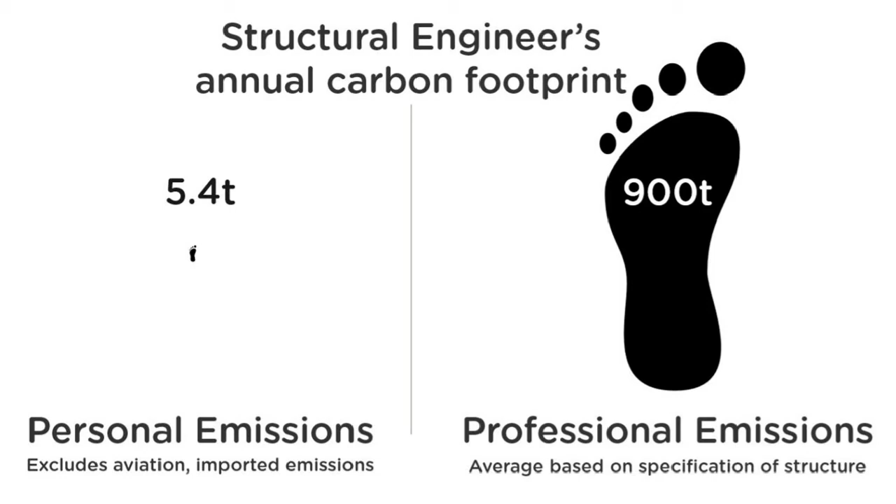Now, to put that into context, you've seen some really good things from Natasha and Margaret about this in terms of an engineer's footprint, in terms of personal emissions versus professional emissions. Now what I think is actually that the professional emissions are a little bit higher than that, even still, just because as Margaret mentioned, most of her things were A1 to A3. Obviously the good work that John's doing now in terms of capturing the A5 in there, I think ours are A1 to A3. I think the professional emissions are actually a lot higher than we actually think they are when we start to include waste. So for me, putting it into this kind of context really helped to galvanize my thoughts on it and work out where we were going to go.

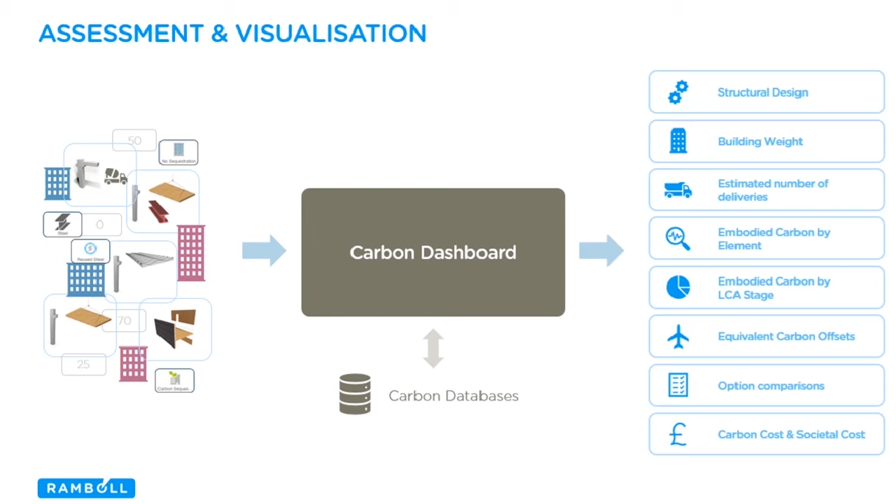So how do we solve this? Well, we're going to hear later, and we've heard from Natasha about challenging the brief, optimizing the design, cutting the carbon. They are exactly where we need to be focusing. But I also think there's another bit to it. When we start to look at it, we can do all these carbon dashboards, we can do life cycle analysis, carbon offsets. We could even start to look at the carbon cost and the societal cost of what we're looking at, right back to what Mike was saying about the donut and things.

But really, I think there is also another layer to this that we should be thinking about, and that's thinking about a digital and data-led approach to decision making. So whilst it's not something that would come naturally to an engineer, the decision-making aspect, the digital and the data-led, it's just a natural extension in my mind of where we are going as an industry and where we need to take ourselves as an industry.

So how do we make decisions at the moment? How do we work through things? Well, normally we have a fairly standard linear process of design, procurement, delivery, and then operation. And through all of these, we start to add value, and at the end of it, we've added a lot of value, whether that value is monetary, whether it's in reducing embodied carbon, reducing overall carbon, those kind of things.

But actually, what starts to happen is at various points, we start to lose that. So that's, again, that question that Margaret answered about how do we ensure our contractors are following through on what we specified. Those kind of things are where we start to lose that. And we end up with what I think is a really big missed opportunity here. And a lot of it, I think, comes down to decision making and how we do that.

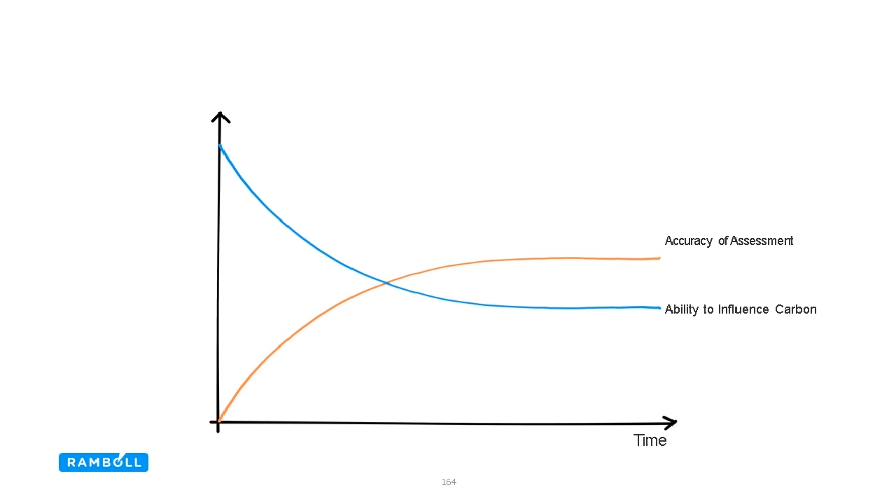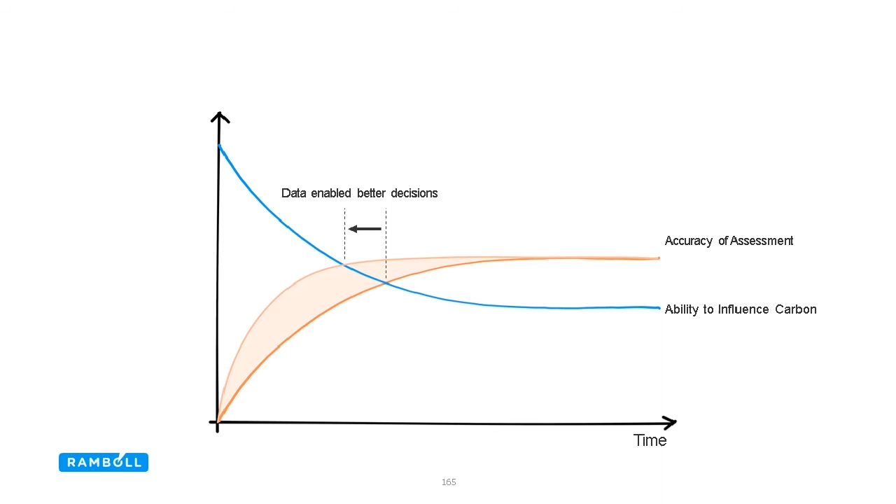So what we can do is, if we start to capture our data and work in a digital way, we can really start to bring that accuracy assessment across to the left. That means our ability to influence carbon is increased, and we can make those decisions at an earlier stage. So we can really start to look at that and address it.

So how do we think we can make better decisions? Well, there are lots of publications out there, some really good ones, about modern methods of construction, productivity, industrial strategy, and they are great, and there's a plethora of them, but our clients are not going to have understood or read those. Really, we need to disseminate that information to them. But I think there's three key things we can do to help our clients and push forward the agenda of minimizing waste, which in my mind means minimizing carbon as well.

So there's three kind of aspects to it. The first one is standardization of our designs, of the ways we're working. The second one, following on from that, and it has to start with standardization, is off-site manufacture - what can we do in terms of off-site, and how can we maximize the opportunities for that? And then overlay that with a digital thread, in terms of how we can use the digital world to enable us to make those better decisions, to go further and faster.

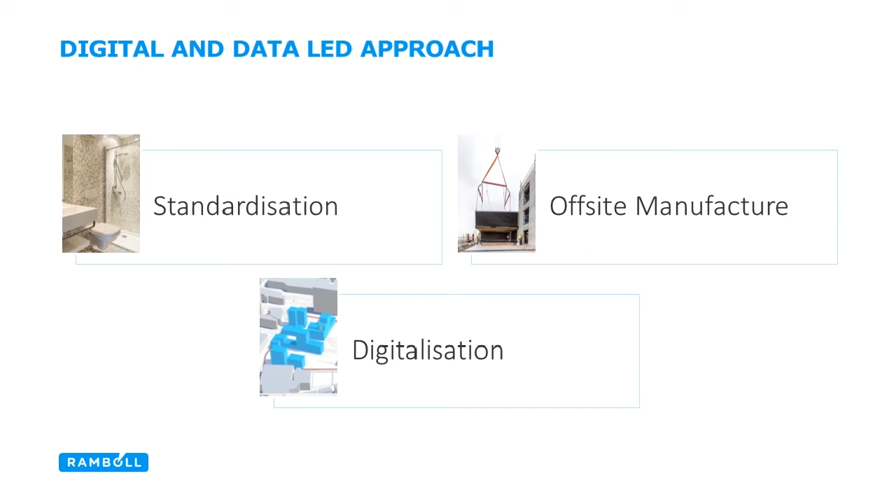Now, some people may say digitalization has lots of drawbacks, and yes, there are, but we have to embrace them and work with them and make sure we can maintain that quality and that service to our clients while producing that, by working down the digitalization route.

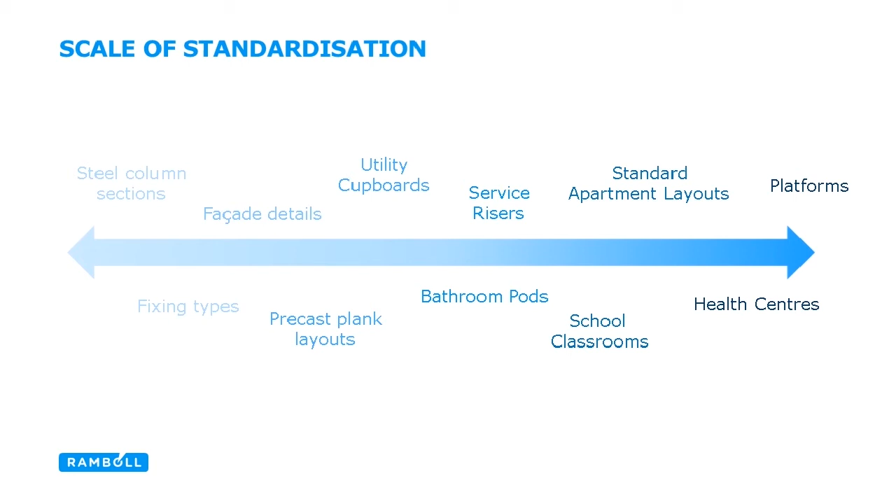So scale of standardization can have many different things. On the left-hand side, we already deal with standardization - we have standard steel sections, column sizes, beam sizes, we have that standardization there. And it can go all the way from the left through to bathroom pods, standard apartment layouts, and through to platform construction. That's really kit of parts, which is where we should be going as an industry to reduce that waste.

But standardization, quite often people think means we'll just get shoe boxes. But actually, in the right ways, it should increase quality, which will reduce waste. It should increase efficiency, again reducing waste, and it still allows us to be creative. It gives us a kind of book to work with in terms of creativity, but you don't have to be constrained by standardization in terms of creativity. There's still a lot of creative thought that can go on in that kind of space.

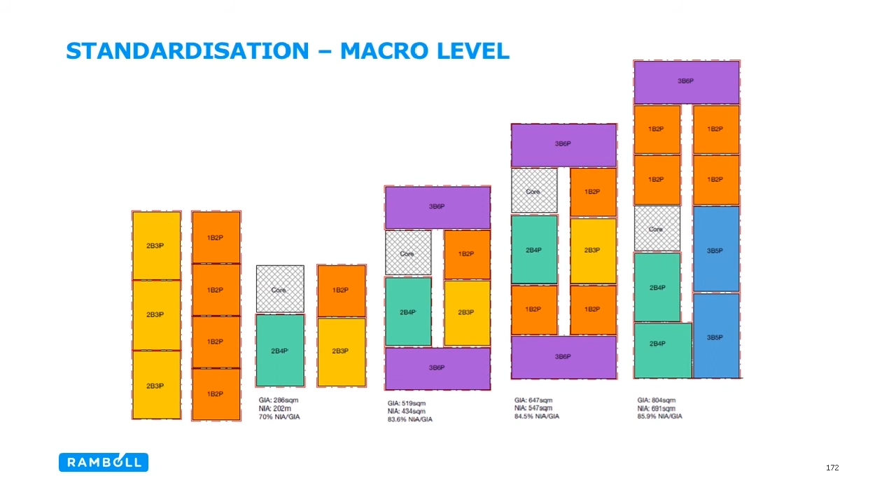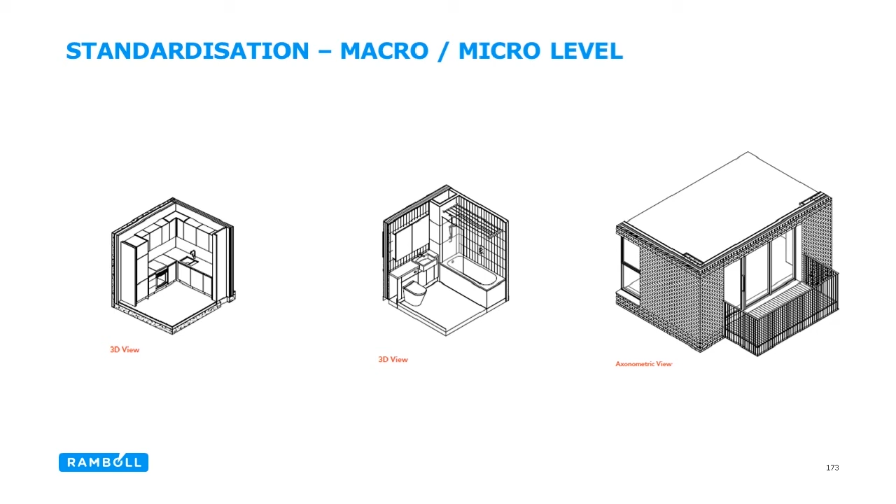And you start to eliminate waste by having repeatability - people know what they're doing, factory controlled environments, all of those very good things that come with off-site or just pre-manufactured aspects. And it also applies not just to structures, but to MEP and how we can work through that.

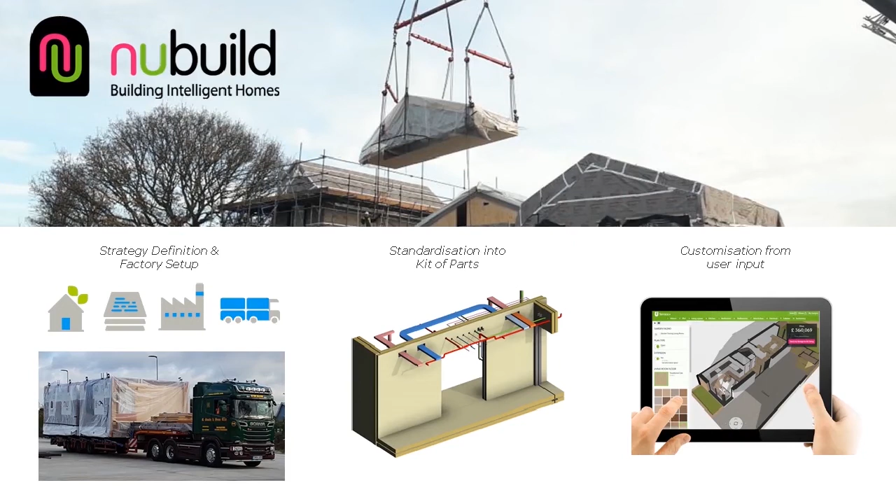There's also the aspect of user customization. Standardization doesn't mean everyone gets the same. We've worked with nuBuild for a number of years, and they have a standardized product in terms of their CLT manufactured houses. But customers are still able to go onto an app and start to customize their design. It's not just-in-time delivery, but you choose your house, how it's going to work, whether the kitchen's at the front or back, those kinds of things. You choose it on the app, and then it goes into the factory. So there's minimized waste, and the customers still get what they want.

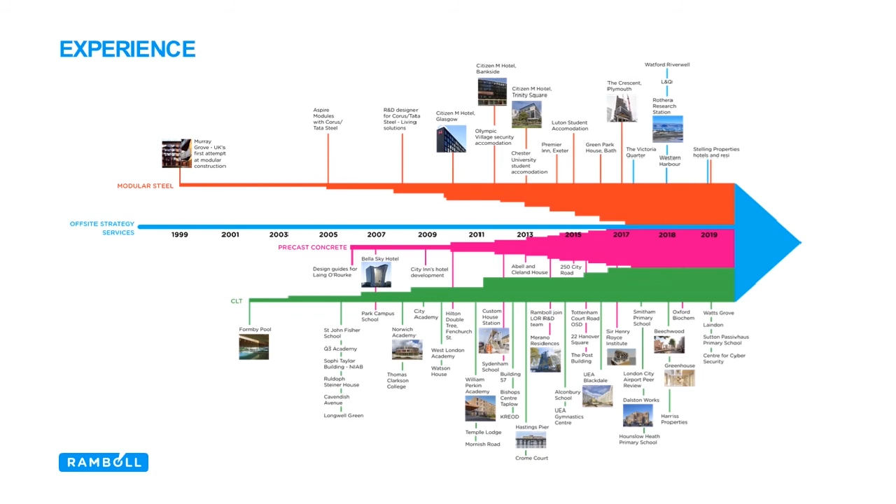In terms of off-site manufacture, there are many different types. I've been fortunate enough to work on a number of projects - not all mine, but ones we've done through Ramboll - falling into three main packs: modular steel, precast concrete, and cross-laminated timber. Those are the main focus we've had in terms of off-site manufacture. There are obviously others, like light gauge steel, which have featured as well.

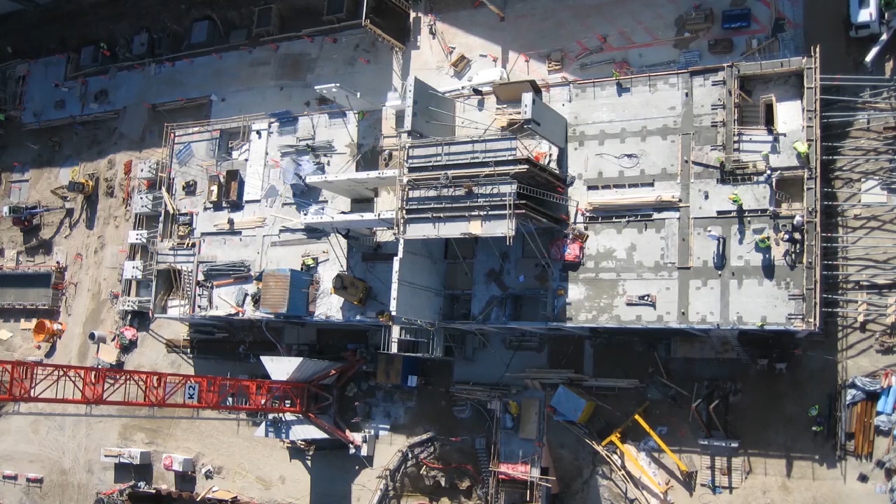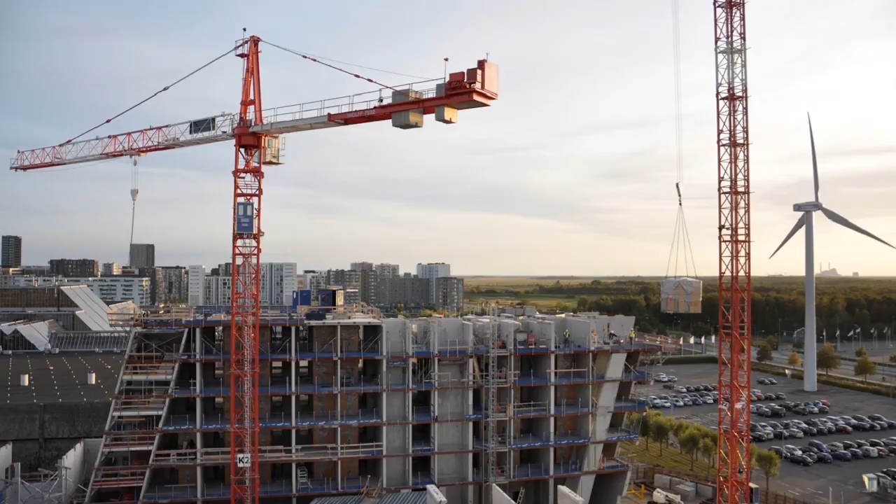As an example, this is Dalston Works, a CLT residential project I worked on a number of years ago. Then you've got things like precast - this is a hotel in Scandinavia where they've adopted precast manufacturing and precast concrete a lot more, making it work on creative projects such as this. This is a hotel which is leaning, with towers that still managed to work in a precast environment.

And then you've got things like modular steel, which have that reduced waste, factory-controlled environment, and lifting into place, with minimal people on site - quicker and safer because of it. This is an image from nuBuild, one of their modules being manufactured, and you can see it lifting into place. It's a very simple technology to use, but still creates very nice accommodation for the customers.

And then digitalization. This really comes down through product development and a kit of parts. If we start to have that product development, that kit of parts, we can really advance the digitalization aspects, because we don't have too many variables. At the moment, when we talk about digitalization, we get scared because there are so many variables. We need to cut down those variables so we can use digital means to help us and move us forward.

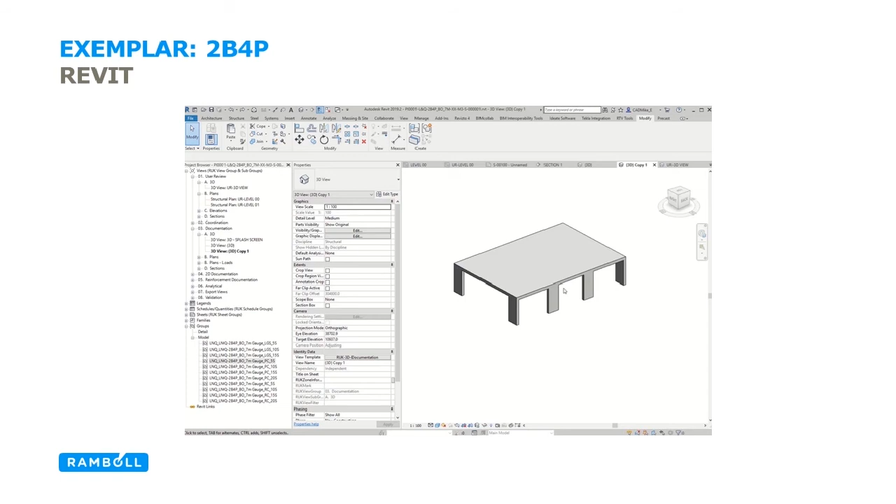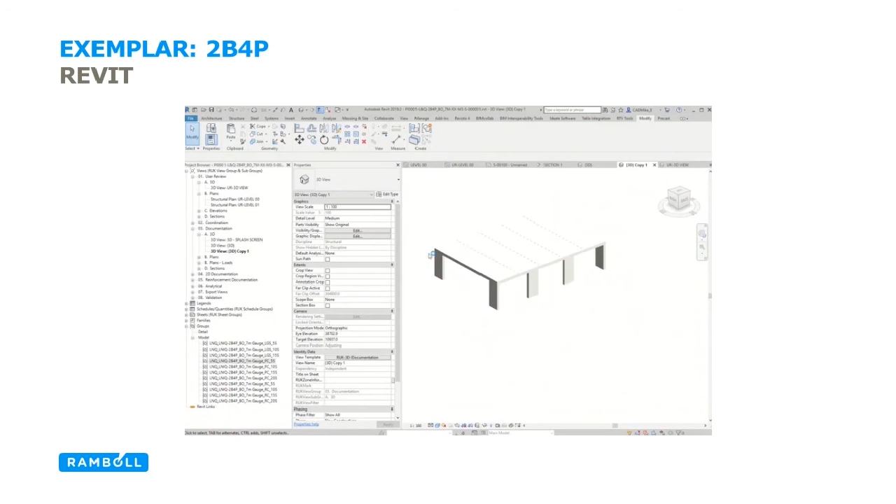This is an example of a simple Revit script we wrote, which allows the client to say, okay, I want an RC frame - actually, maybe I want to change that to precast. Then I can individualize my elements and change them again and work through it. It allows them to repeat those elements and copy them across. It's got the engineering background behind it, but allows a standardized approach to things.

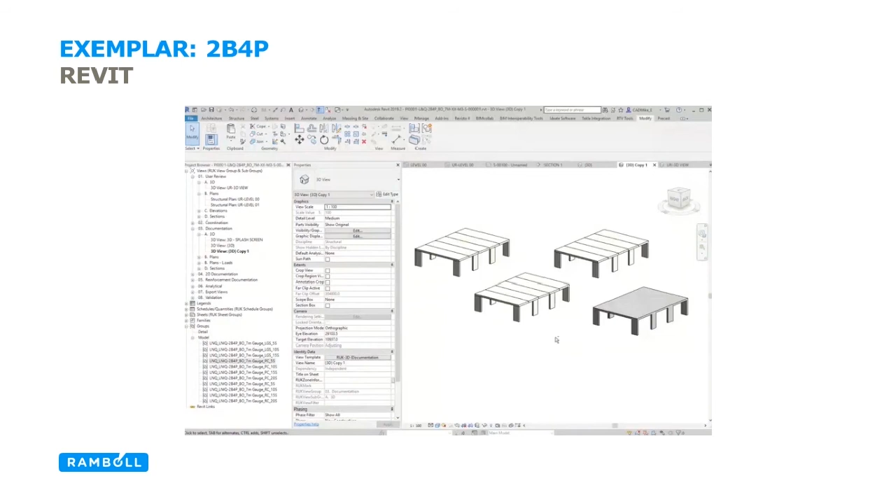Now, this might be slightly controversial in terms of where we're going as an industry, but we are going to be going there, and I think we need to embrace it. We need to make sure we're still providing clients with a quality service, one that has design in there, while still enabling us to cut the carbon and cut the waste.

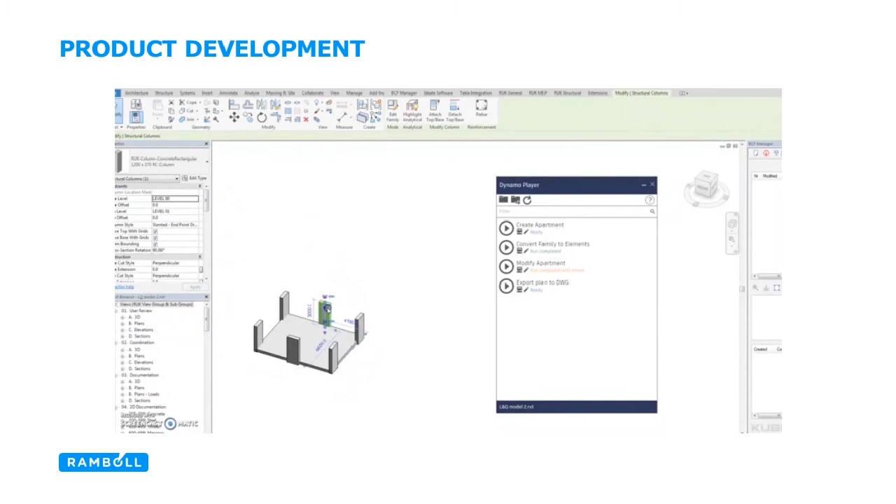This is another script we've written that allows a very quick modular approach - we have a CLT floor, maybe an apartment layout. We look at the height of the building, what size elements we need, and then adjust it, maybe saying actually I don't want CLT, I want a concrete frame - what does that look like? This enables the cost manager and everyone else to get that data really quickly, so clients can make those decisions - okay, we know which frame we're going for - and then start down the path of optimizing and refining to cut the carbon even more. It gives them that early decision-making process to make quick decisions, and then move on knowing we can invest our time and effort into cutting carbon even more.

So really, what I'd like to end with is how that digital and data design process really works. If we start off with a kit of parts, we can start to design better, we can start to optimize, we can build quicker. Then we can start to reuse building parts. We also need to think about what we're doing now and how we can reuse that in the future. If we can standardize and have that kit of parts, it makes it much more probable that we will be able to do that.

And then that feedback and improvements. John was talking about that database of carbon. That's really where we need to be. We need really good data, because then we can improve and get better at what we're doing.

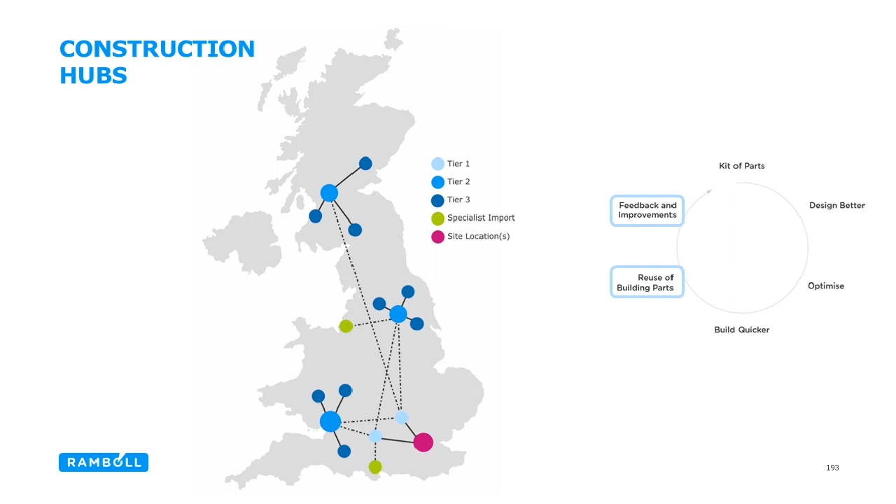So what does the future look like? I hope the future really focuses on the reuse of building parts and the feedback and improvements, and that could be as simple as construction hubs which allow parts of the building to be stored and then called on and reused in the next stage or another project. Because clients at the moment, when they finish a project or demolish something, will either look to reuse it or send the crushed waste away to be reused. But why can't we reuse elements of it? If we have that kit of parts, standardized design, and waste storage, we can really start to move it forward.

I think if we can have improved decision making through a digital and data-led approach, we can really start to accelerate and push forward all the initiatives we've heard of today. We need to help our decision making with our clients and everyone else. As Mike said earlier, as engineers we can only have 10% impact, but if we include design teams and clients, we can increase that to 50%. That's really where I think we should be going and testing where we can get to. Thank you.